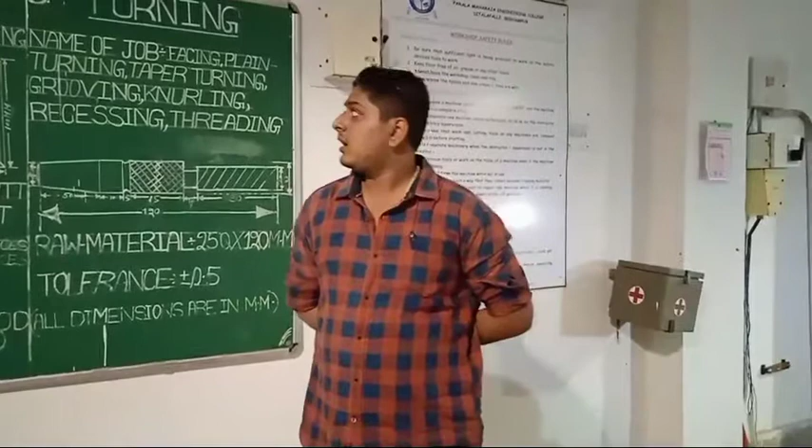So students, today we have discussed about how to prepare a job or how to make a job in a lathe machine. We have used cylindrical work, with operations like facing, plain turning, taper turning, grooving, knurling, and external thread.

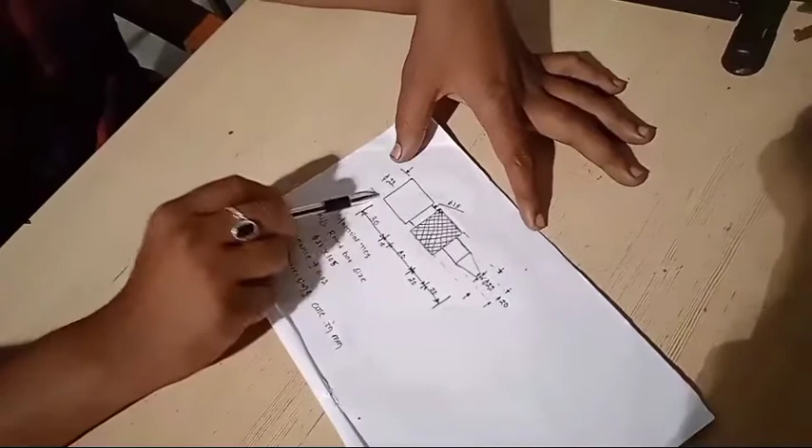In going to make a job, we discuss how to draw a figure. See, this is our figure. A cylindrical workpiece is there. Our bigger diameter is 22, and our lowest diameter is 15. Here, first one is our facing operation.

Then we go to plain turning. Next operation is our step turning. See, this part is a different diameter, so this part is called our step turn.

Then next we go to grooving. Then next we go to taper turning. Then third part is our knurling. Last one is our threading.

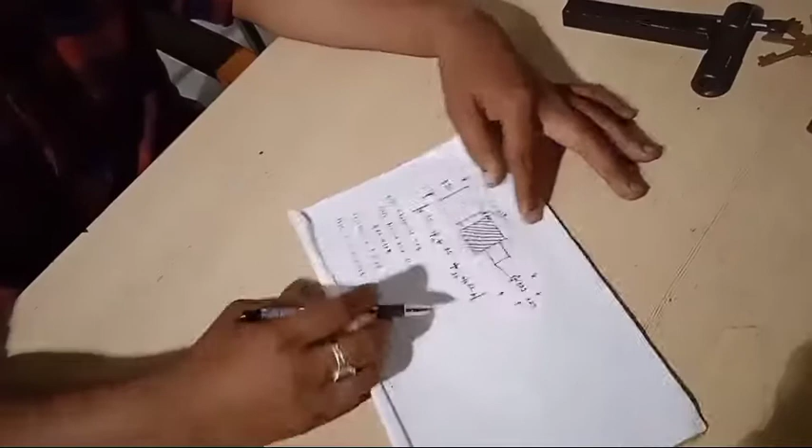Here our raw material required is MS round bar. MS full form is mild steel or low carbon steel. Mild steel diameter is, this is the symbol of diameter, our diameter is 25 and the length is 105. Here our tolerance is plus or minus 0.02. All dimensions are in mm.

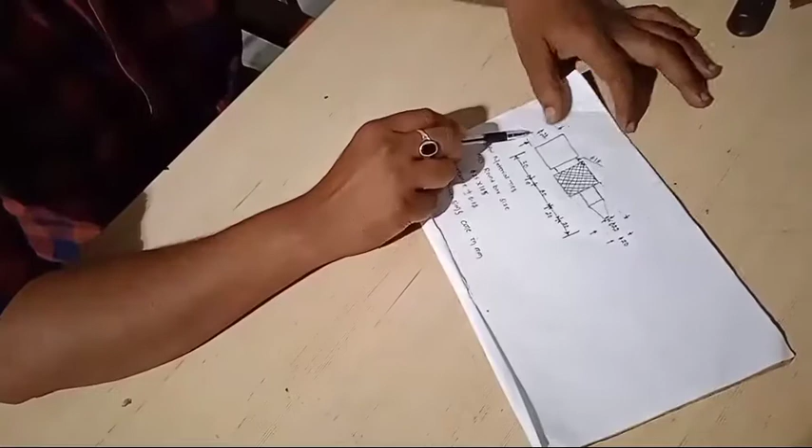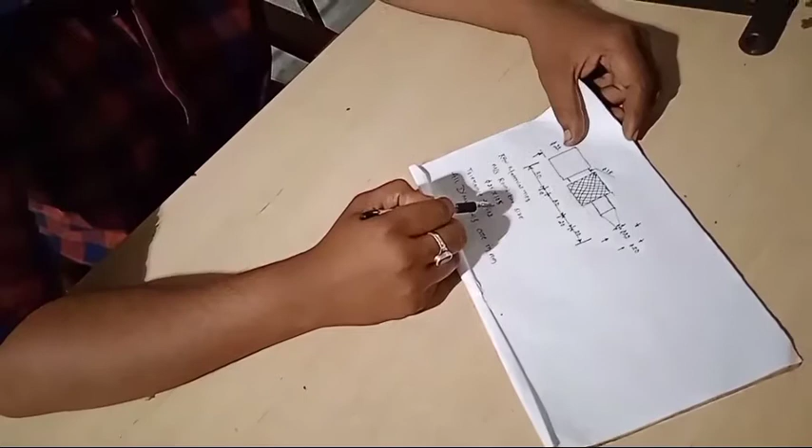One example: here diameter 22 means diameter is 22 mm. Here 30, so we call it 30 mm, 10 mm, 20 mm. Total length is our 100 mm. Material required is 105 mm. After making a job, we get a length of 100 mm.

Then we go to how to make a job. To make a job, before we use some machine tools. What are the tools? In power hacksaw we cut the raw material, or to remove it, from cylindrical raw material.

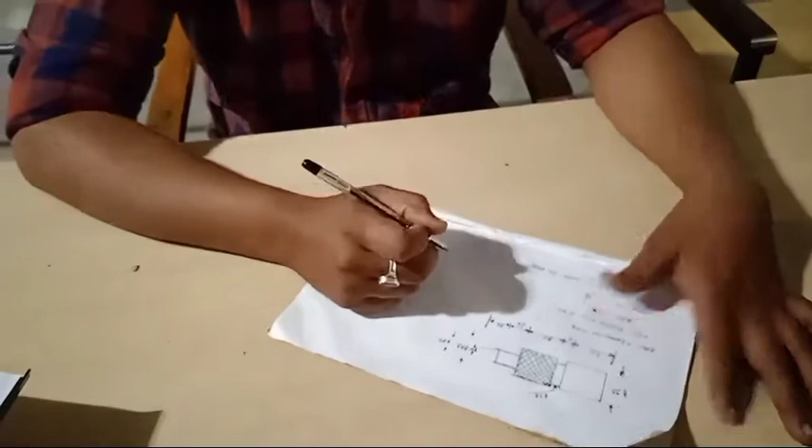Then apparatus required: first one is our measuring tool. What are they? First one is our steel rule. Second one is our Vernier caliper. Here is our Vernier caliper.

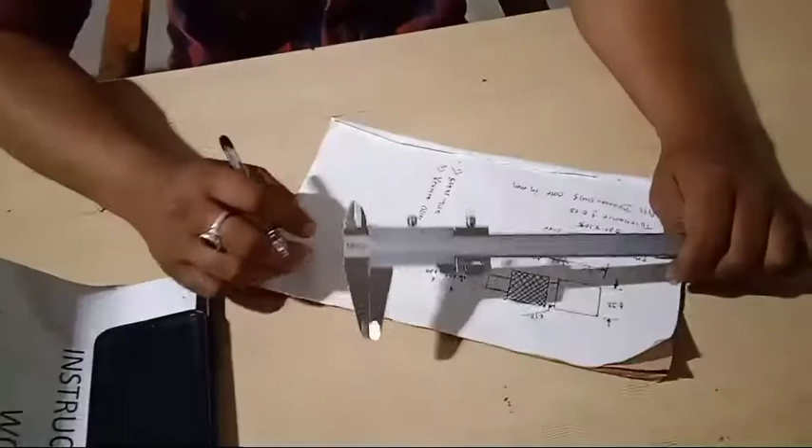Second one is the marking tool, scriber or chalk medium. Chalk is used for layout marking.

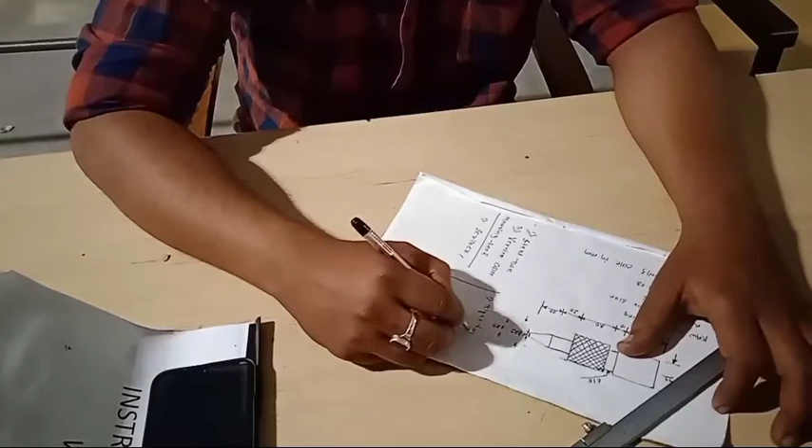Then third one, apparatus required in machine: first one is our right hand single point cutting tool.

Second one is our knurled tool. Here it is our knurled tool. This tool is used to make a knurling operation.

Third one is our V tool. V tool is used to make an external thread.

Fourth one is our grooving tool. Grooving tool is used to make a groove.

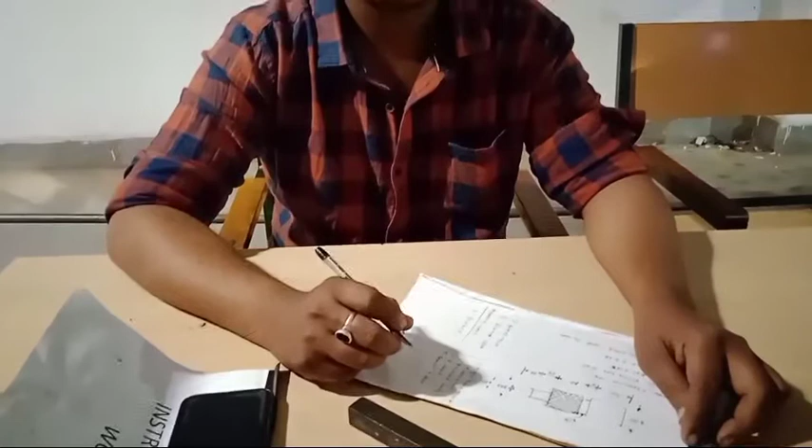That's it. Material required is our length is 105 mm and the diameter is 25 mm. Our machine is to remove the raw material by the help of, one machine is our power hacksaw.

This is our power hacksaw. Power hacksaw, how to work? See.

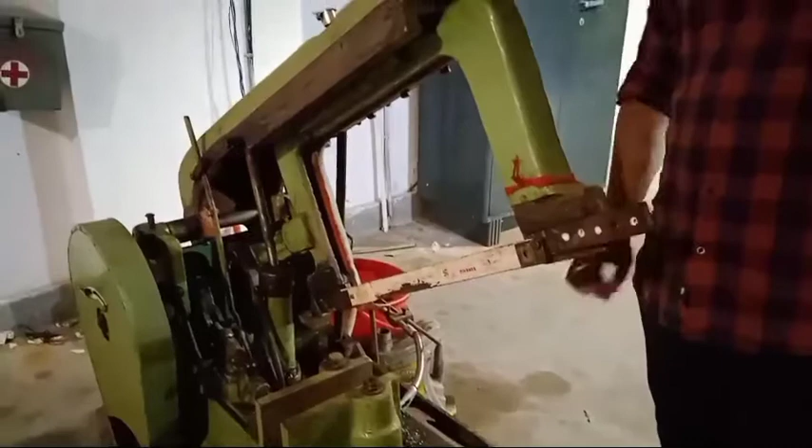This movable part is called the RAM. RAM is moving to forward and backward direction. Our material is removed in backward direction. See, these are going to backward direction, so our metal is removed in backward direction.

Here one part is there, this part is called the hydraulic tank. In the hydraulic tank, the ram is going downward. Suddenly, going to origin point, it pushes ahead, and the ram goes to its origin point.

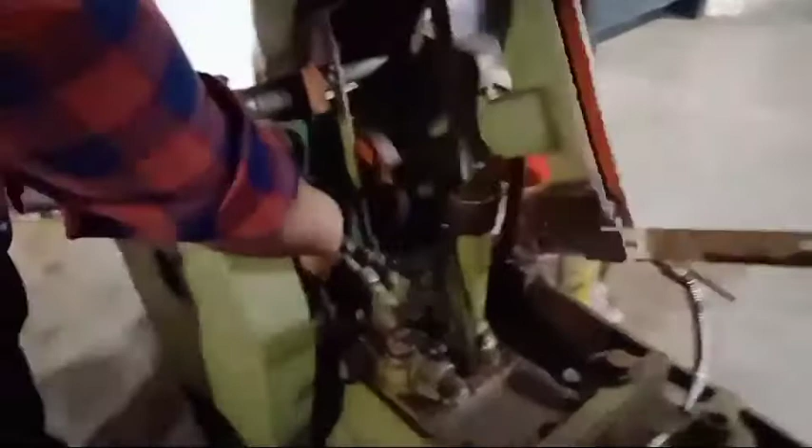Ram is going to forward and backward direction. Here one lever is connected. When it goes to downward direction, our ram is going downward. When it goes to origin position, the hydraulic tank is pushed up in upward direction, going to its origin position.

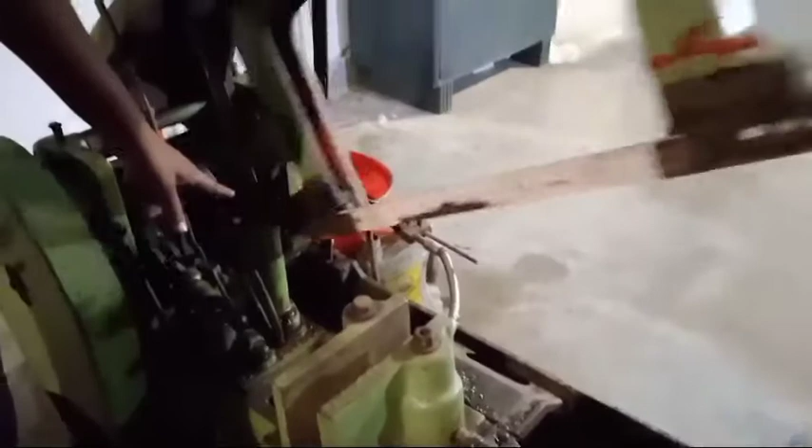Then we are going to how to cut a raw material. Our raw material length is 105 mm. In the steel rule, the dimension is 10.5 centimeters. Here we set a 105 mm length, then this part is cut or removed into two pieces. Now we cut the raw material.

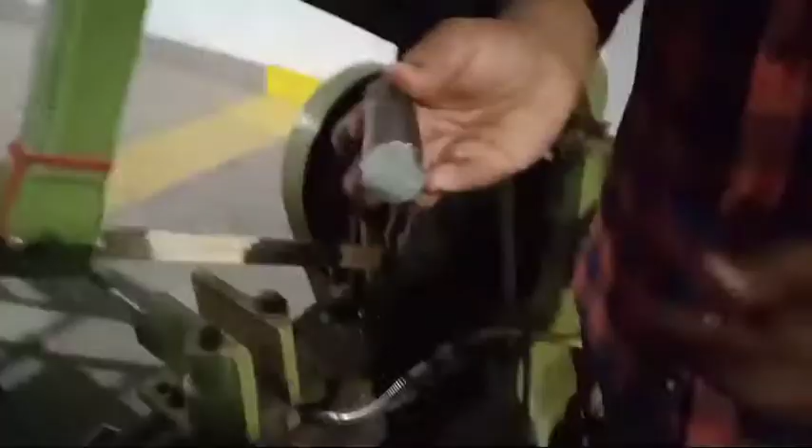Now going to measure the length. Here our dimension is our zero reading. Zero is coincide in 101, 102, 105. Okay, zero is coincide in 105. So our length is 105 mm.

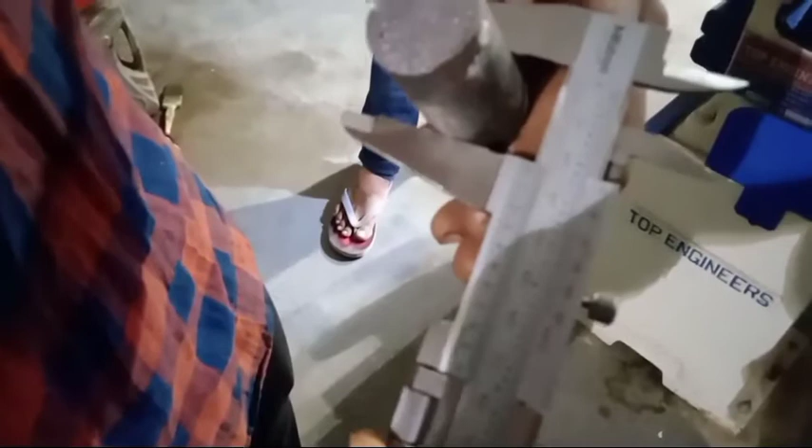And the diameter is our diameter. Diameter is our 25.4 mm.

So it is our specimen or workpiece or job. How do we get a job? To show in figure, complete all the operation, we call as job. Now this part is called as workpiece. See both ends are irregular and not parallel to the base. See, incline part is held in inclined position.

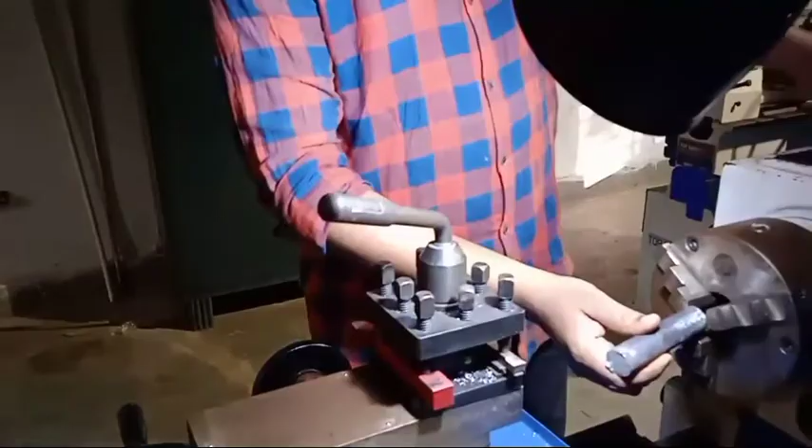Now we go to facing operation. In lathe machine, first operation is our facing operation. In previous video, I said how to create a facing and how to set the carriage. Carriage top side is our tool post. How to set the tool post position.

Again I repeat, our tool post is going to set for approximately 45 degree. Then our turning mechanism is working. What is the turning mechanism? The workpiece is rotated against a single point cutting tool on its own axis. Against means what? Anti-clockwise.

Friends, here we get a live center. See our point is there, center point is our live center. Again I cut one part, one depth of cut. Again we get, again.

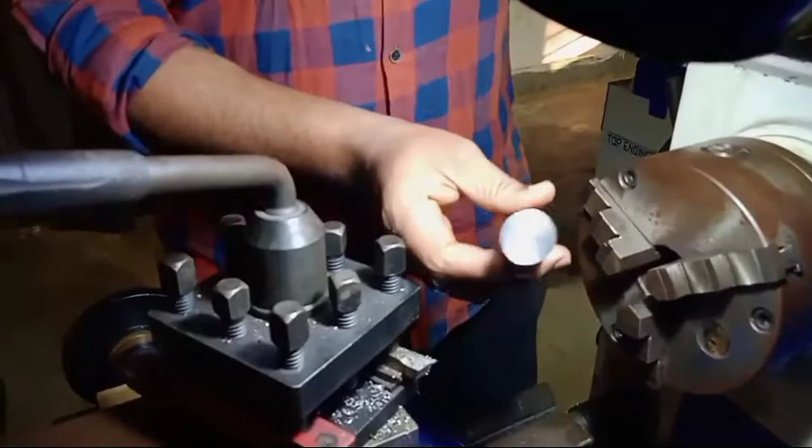Okay, now complete my facing operation. In before facing operation, the workpiece is not parallel to the base. Now going to facing operation, our workpiece is stay in vertical position. In one end is complete facing operation. Now we get a dimension value.

Our raw material required is 100 mm. We going to power hacksaw, we get a 105 mm length. Now in facing operation we get a 100 mm length. In facing operation our length is decreased. Then we go to next end of the workpiece, or next end remove the workpiece.

Now I going to fix in a work holding device. Again going to facing other end.

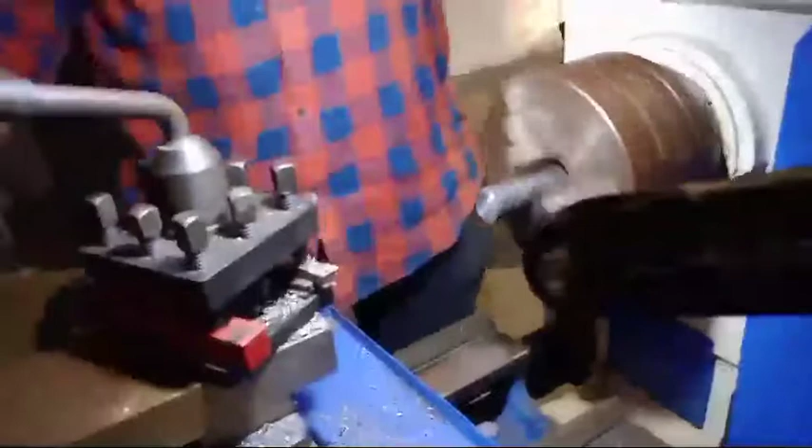Finally we get a 100 mm length by using facing operation. See both ends are removed. Unwanted material is removed in facing operation, workpiece both ends. Now we measure a length value. Our length dimension is our 100 mm.

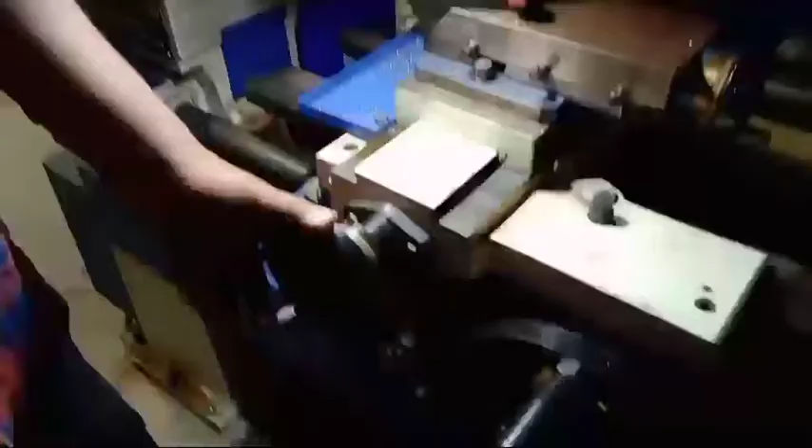Start. In facing operation, compound slide or carriage wheel is going to our feed, or depth of cut. And our cross slide hand wheel is going to create a cutting speed. This is our feed or depth of cut, 1 mm, 2 mm, 3 mm, or 0.5 mm.

Then force is applied, the force is called as a cutting speed. Here we going to move or rotate circular, clockwise or anti-clockwise. Our cross slide is movement, and it's going to create a cutting speed.

In plain turning, the diameter value is reduced. That process is called as plain turning. Now going to create a plain turning operation. Same process, we hold the workpiece in the work holding device.

And our tool post is going to 90 degree angle, 90 degree position. Then properly tight. In plain turning, carriage wheel is going to use our cutting speed, and cross slide hand wheel is going to depth of cut.

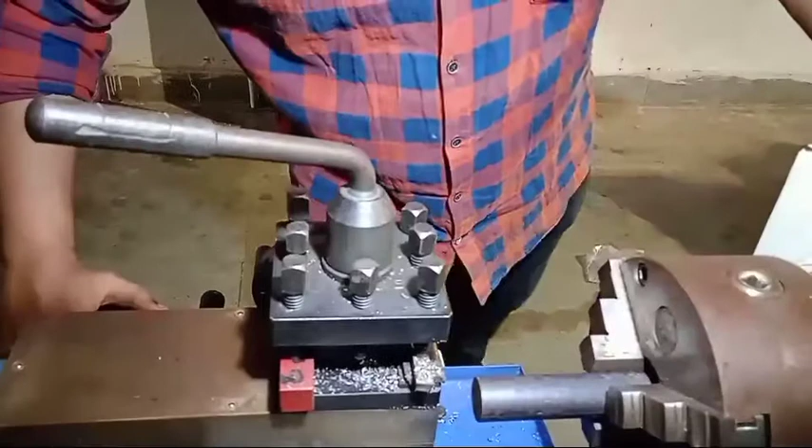Now we create a plain turning operation. Same process, workpiece is rotated against a single point cutting tool.

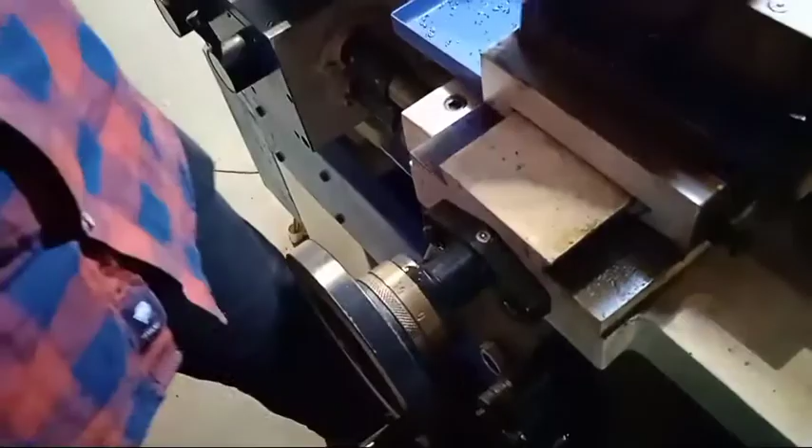Here you see, our diameter is reduced. Here our cross slide hand wheel is going to depth of 0.5 mm, 1 mm, 1.5 mm, 2 mm, 2.5 mm, like that. Now when we put the value, 10 division is called as 1 mm. Then our workpiece metal is reduced from the workpiece by 1 mm.

Before we go to make a plain turning operation, we check the diameter value, is our 25.4 mm. After I apply a cutting force of 1 mm, see what is the diameter value. Start.

Now we check the diameter value. Zero is coincide in 24.2 mm.

In same process, we make or create a plain turning operation, 100 mm length and the diameter is 22 mm. Step turning is equal to plain turning operation, but in step turning diameters are varied.

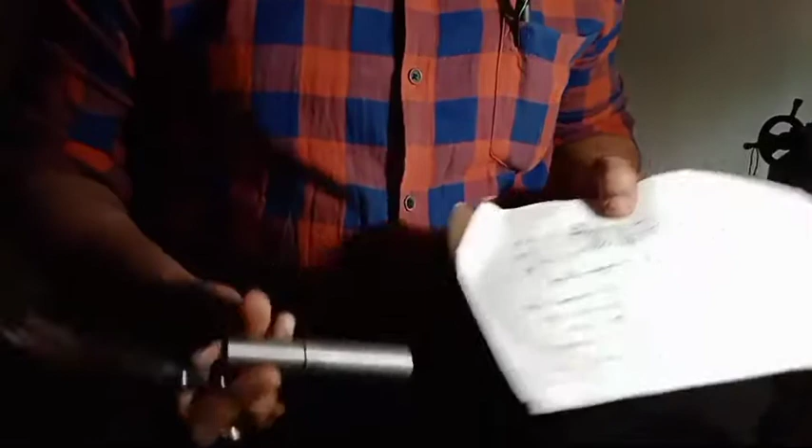After complete our plain turning or step turning, as shown in figure, dimension value and our specimen value, by the help of vernier caliper. Small diameter is our, here, 20 mm, and our bigger diameter is our 22 mm. Got clear? Here is a 22 mm and step part is our 20 mm.

Then we completed 3 operations: what are facing, plain turning, and step turning. And fourth one is our grooving operation. In grooving operation, we use marking process. In marking process we have used layout marking. Layout marking is use of chalk media, or thin coated chalk by the help of chalk piece.

Okay, now we hold the specimen or workpiece with the help of our work holding device.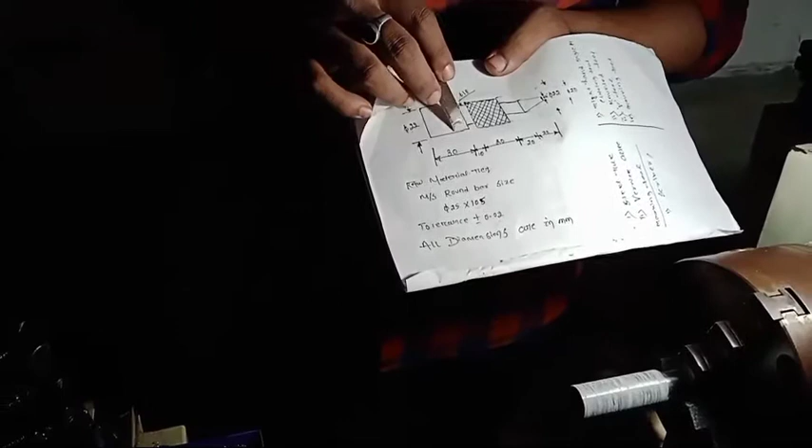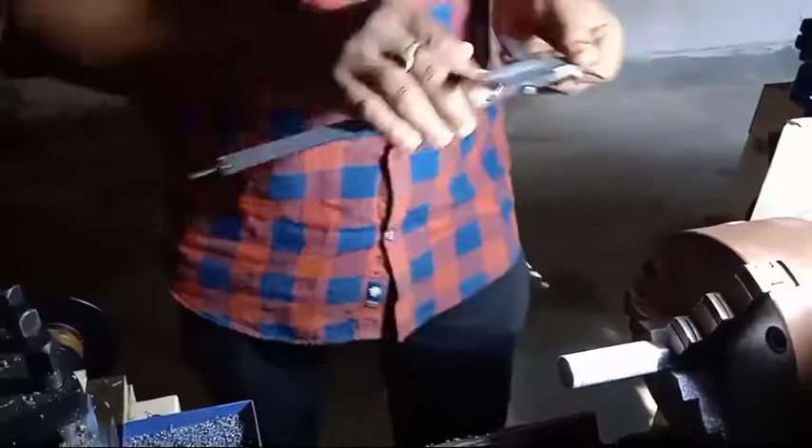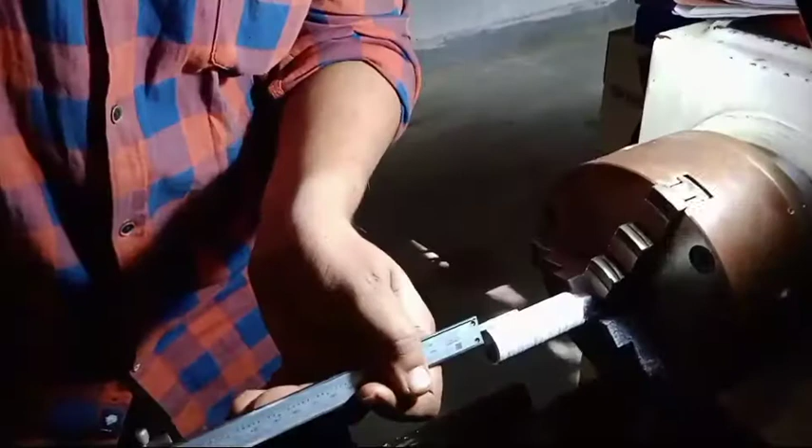In the figure, this part is called our grooving operation, with length 30mm and diameter 22mm. The grooving part is at 10mm distance. As shown in the figure, we start and measure the dimension value of 30mm. Zero coincides at 30mm. Then I tighten and mark the specimen with the help of a scribe.

So complete our 30mm, then plus 10, meaning our dimension value is 40mm. Zero coincides at 40mm. Okay, same process, marking with the help of scribe. We draw a mark line. This is our marking point.

For witness marking, at this point, witness marking means dark marking. We use our single point cutting tool here for witness marking.

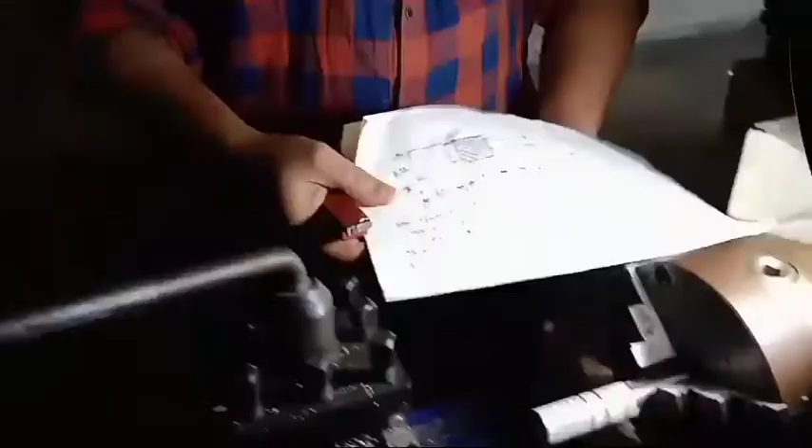So here students see our two marking points. At this marking point, we perform one operation called the grooving operation. In the grooving operation, we use the same single point cutting tool, moving it longitudinally to get a grooved part, as shown in the figure. This is the process I make for the grooving operation.

First, we hold the cutting tool with the help of our cutting tool holding device, called the tool post. Our cutting tool is held and our workpiece or specimen is also held. Now we create the grooving operation from this point to this point. Let's see how to make it.

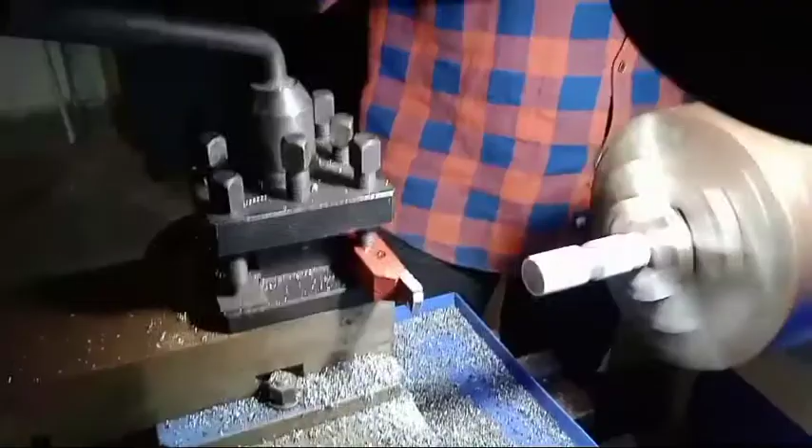Now our grooving operation is completed. Then we check the measured value here.

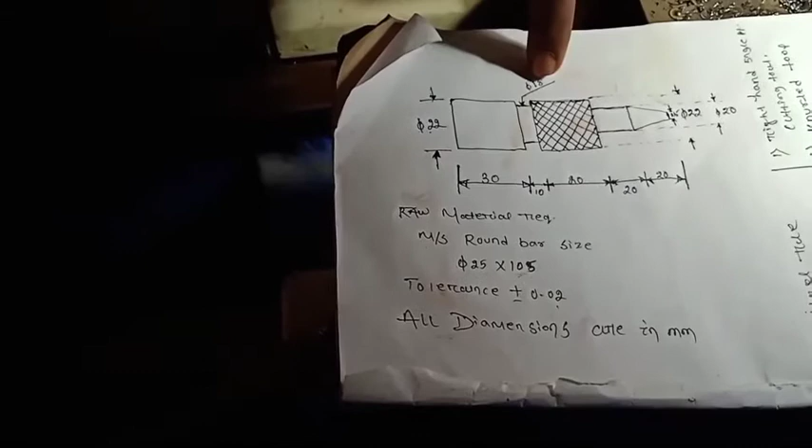Here our zero is coincided at 15, 16, 17, 18. As shown in the figure, our diameter is 18mm and we get 18mm, matching both the drawing and our specimen. Here is our 30mm, 10mm and 20mm - same as 30mm, 10mm and 20mm. So here we completed our grooving operation.

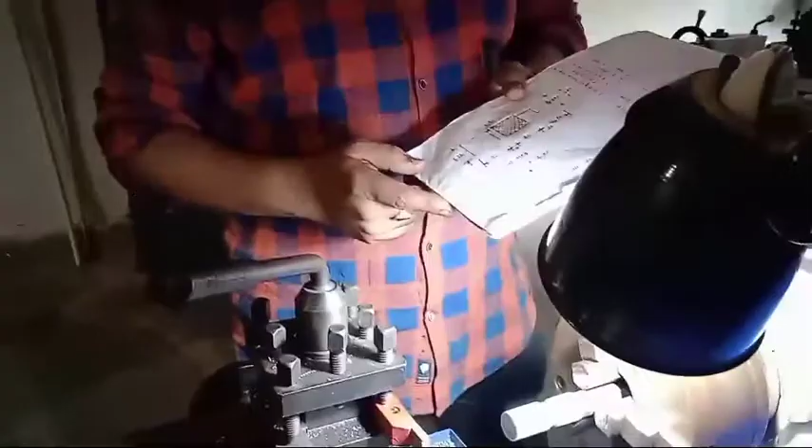Our next operation is the knurling operation, made with the help of a knurl tool. It is also moving longitudinally, and we make a knurled surface.

The knurled surface is used for gripping purposes. Here's how to make the knurling operation. First we set the knurl tool, same process with the help of the tool post.

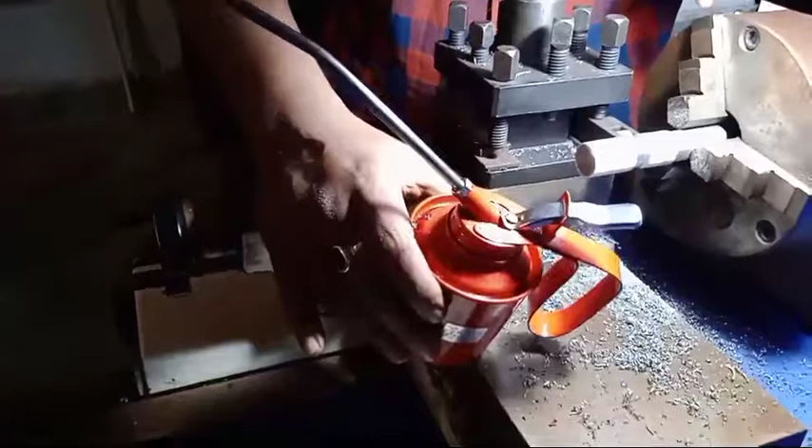Our next operation is knurling. Before we start the knurling operation, we use some process - knurling produces friction, so we use lubricant or oil to reduce the heat. So now we start the knurling operation.

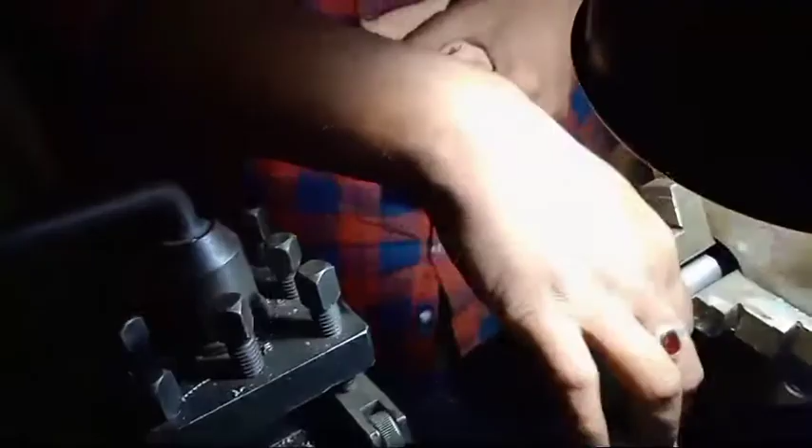So we complete our knurling operation. All students see this part - this is for gripping purpose. Here we made the knurling operation.

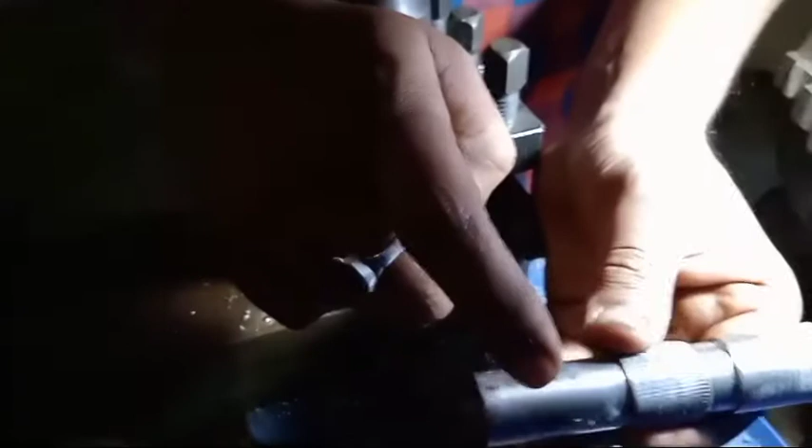First is facing, second is plain turning, third is step turning, fourth is grooving, then knurling, and our last or final operation is taper turning. As shown here, in taper turning we have one bigger diameter and one smaller diameter, with the length being conical.

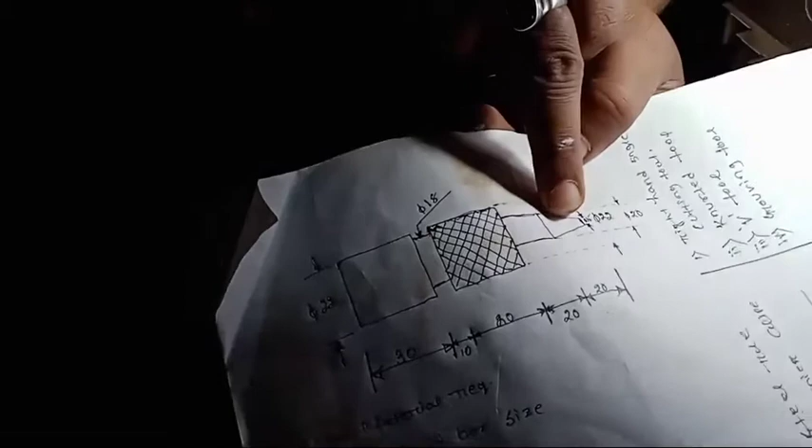So then we calculate our taper angle. How to calculate the taper angle? Let's discuss. Taper turning process is classified into three types - one is the form tool method.

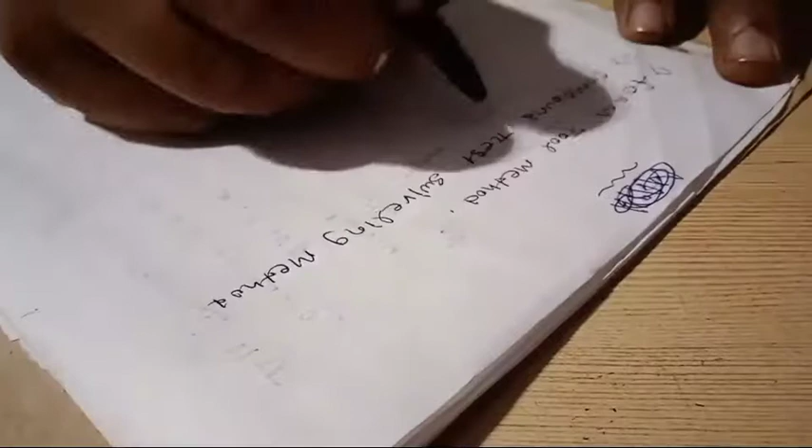Second one is our compound rest swiveling method. Third one is our tail stock offset method or set over method. So three types of our taper turning operation. In this small operation, as shown in figure, our length is 20 mm, bigger diameter is 20 mm and small diameter is 15 mm.

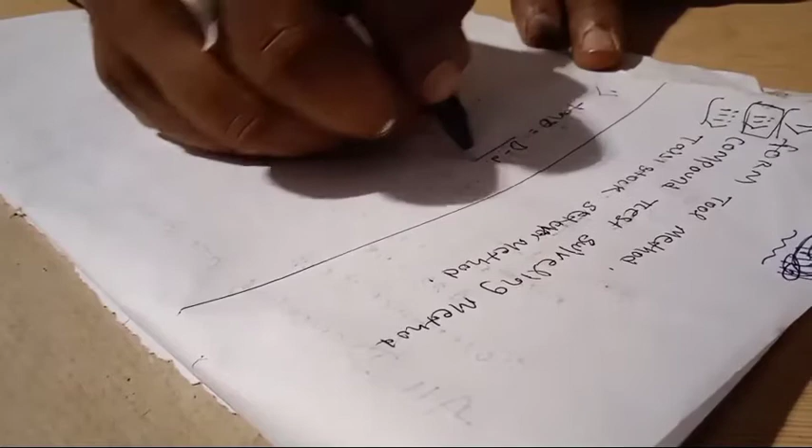So it is called small taper turn. We have created this taper turning by the help of our compound rest swiveling method. In compound rest swiveling method we have two formulas. First one is tan theta equal to big D minus small d by 2 into L. Other one is capital D minus small d by 2 into L into 630 by 11.

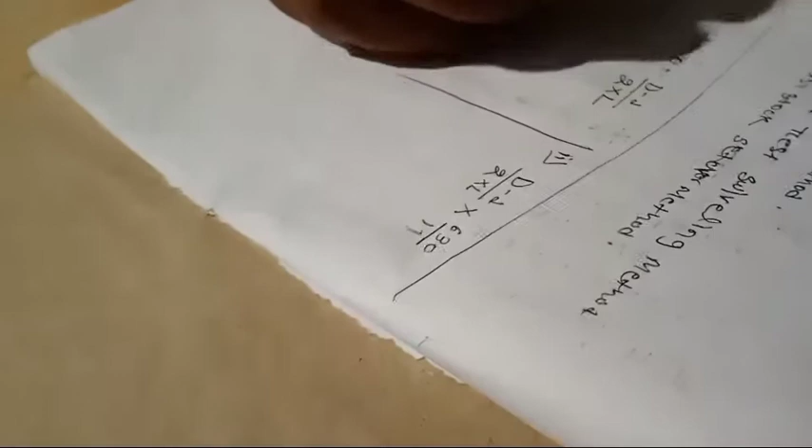Here big D is equal to our 20 mm, small d is equal to our 15 mm, and length is our 20 mm.

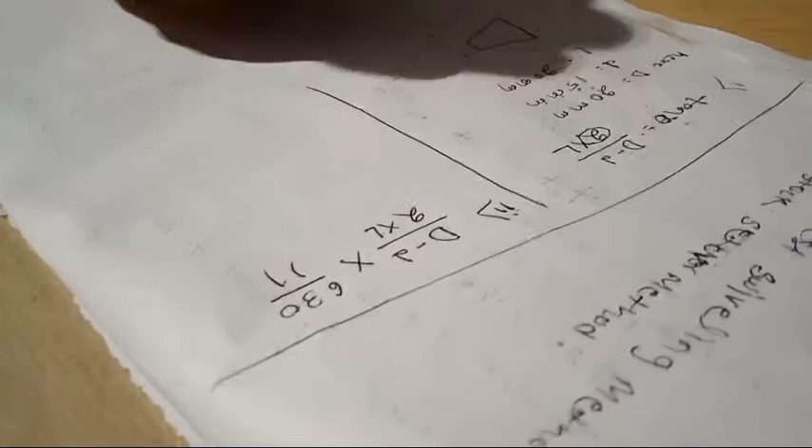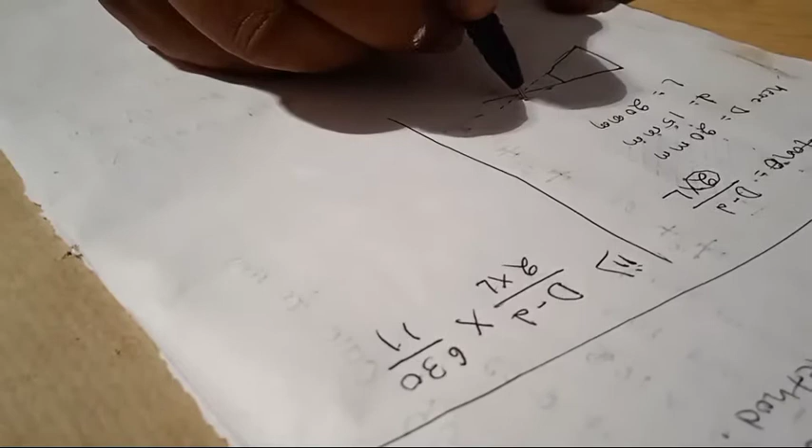Here students, you have one question: sir, why we multiply by 2? Because in taper turning, this part is our taper turning, so length is expanded on this part and that part, and it coincides in a single point, and our length is missing this part. So we have multiplied by 2.

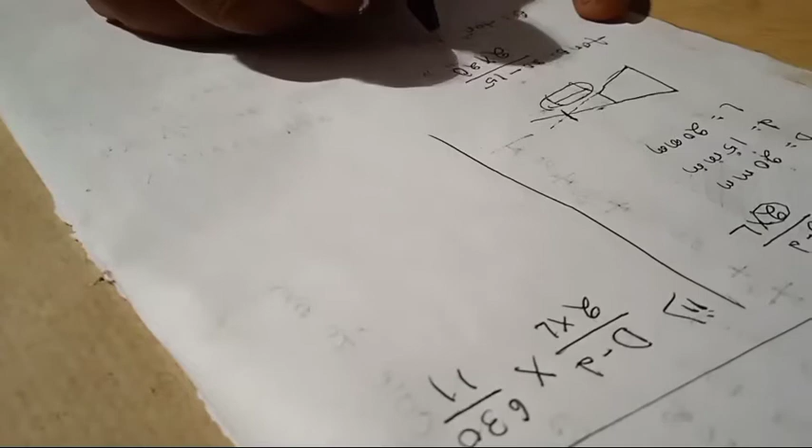So now we calculate: tan theta equal to big diameter 20 mm minus small diameter 15 mm, over 2 into length which is 20. Now theta equal to tan inverse of 5 by 40. So angle, students, we get theta value as 7.15 degree. So we take approximately 7 degree.

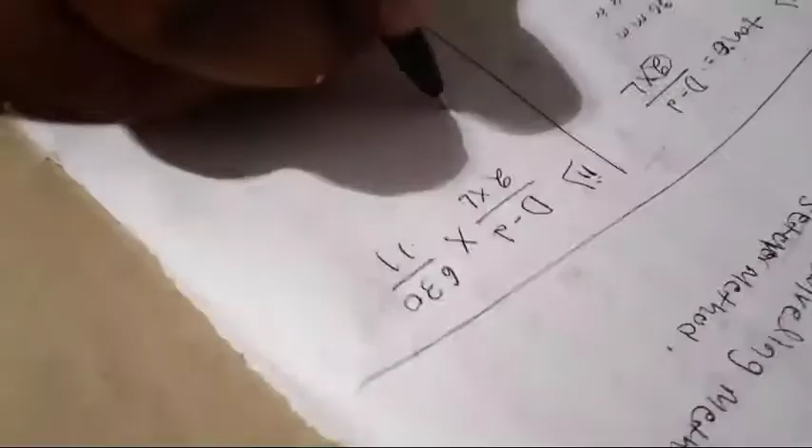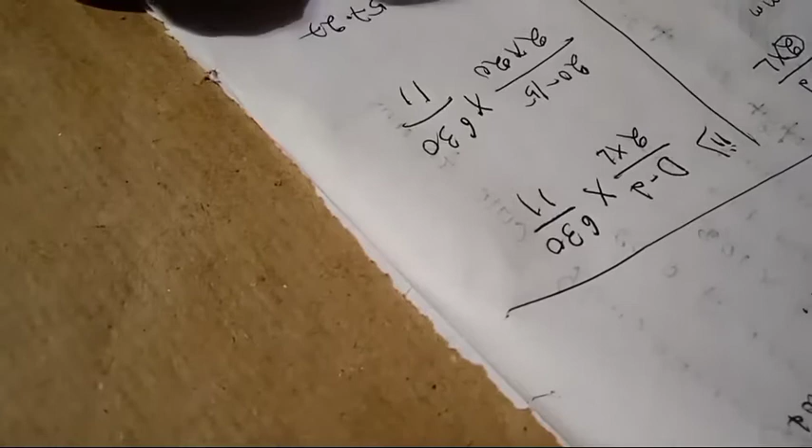Same here, same process. Our big D is 20 minus small d is 15, over 2 into 20, into 630 by 11, implies 5 by 40 into 57.27. So our answer is same, 7.15. So same, approximately taken as 7 degree. Both calculations give the same reading. So students, we get 7 degree.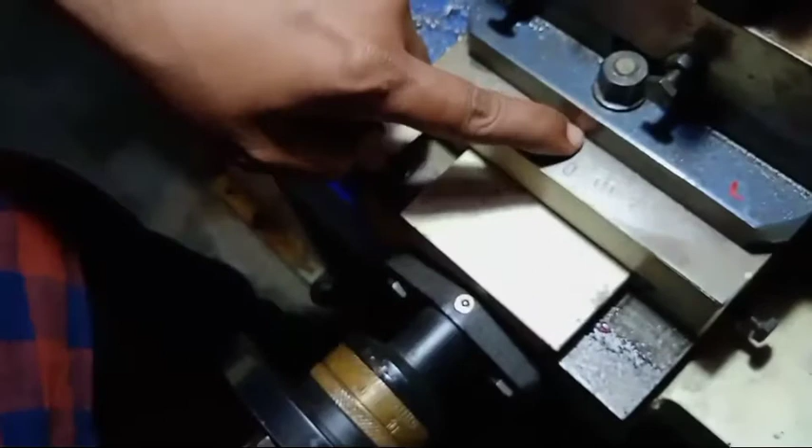So how to apply 7 degree? See this part, this is our compound rest swiveling method, compound rest degree swiveling method. Here students will see 0, 1, 2, 3, 4, 5, same divisions, total 10 divisions. So it is 10 degree, 20 degree, 30 degree, 1 degree, 2 degree, 3 degree, 5 degree. Our reading angle value is 7 degrees. So we take...

Here we get an origin point or marking point, and create 7 degree in clockwise direction: 5, 6, 7. And other side is our make taper turn, this part.

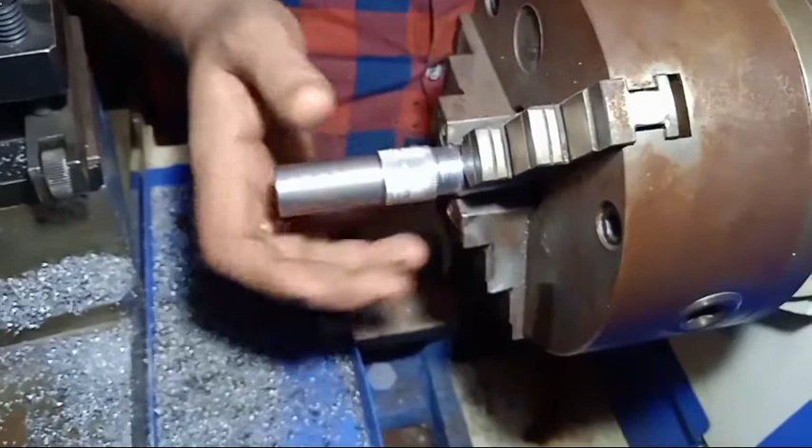So here students, same, we take a marking media by the help of chalk, and our single point cutting tool like this.

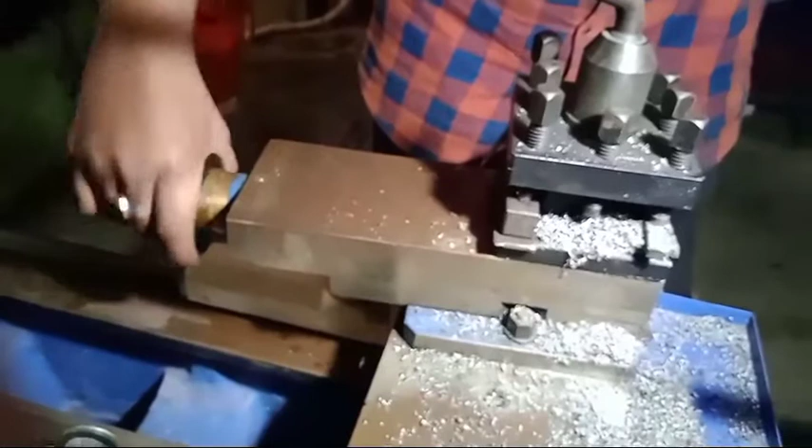In taper turning, our cross feed is applied to apply a depth of cut, and our top slide is movable longitudinally or horizontally for cutting speed. In plain turning, cross feed is applied for depth of cut, and compound slide or carriage wheel is longitudinally movable for applying cutting speed. In taper turning, same process, but cross slide is depth of cut and top slide is our cutting speed.

Now we create the taper turn. Same process, students: our workpiece is rotated against a single point cutting tool, clockwise or anti-clockwise.

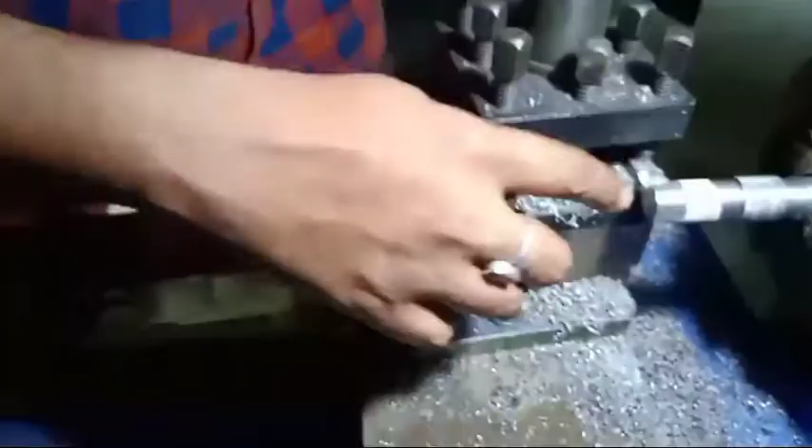Here you see, our conical length is provided or made, conical length is created. Same process followed: automatically small diameter comes out as 15 and our bigger diameter comes out as 20. Now we have completed our taper turning.

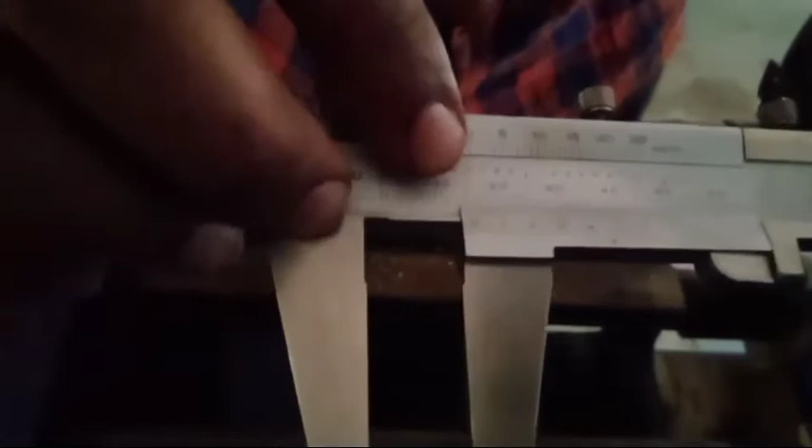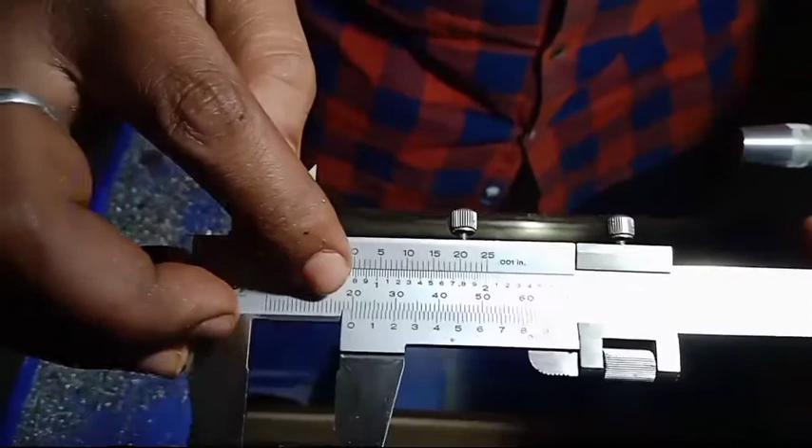Then after, we check the dimension value. First we check our small diameter - it is coincided in the 15 and 16 middle part. And our bigger diameter is coinciding at 20 mm.

That means our bigger diameter is 20 mm. Length or tapered length is our 19.9. So students, the measured value is 19.9, small diameter is 15.02, because our tolerance given is some plus or minus 0.02. That means plus 15.02 or minus 14.98, same process.

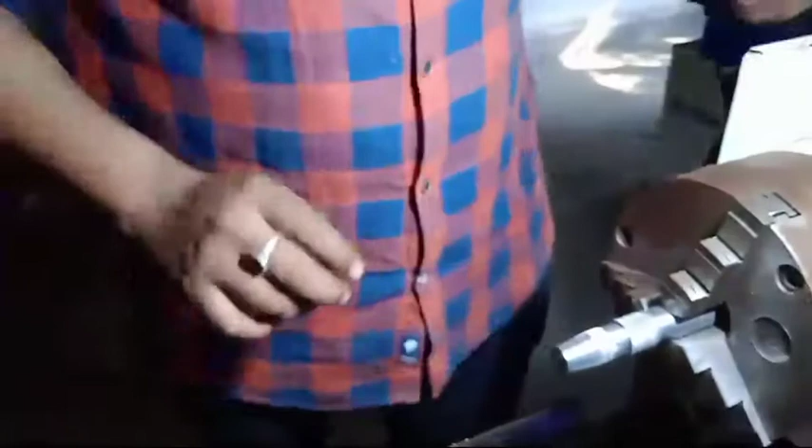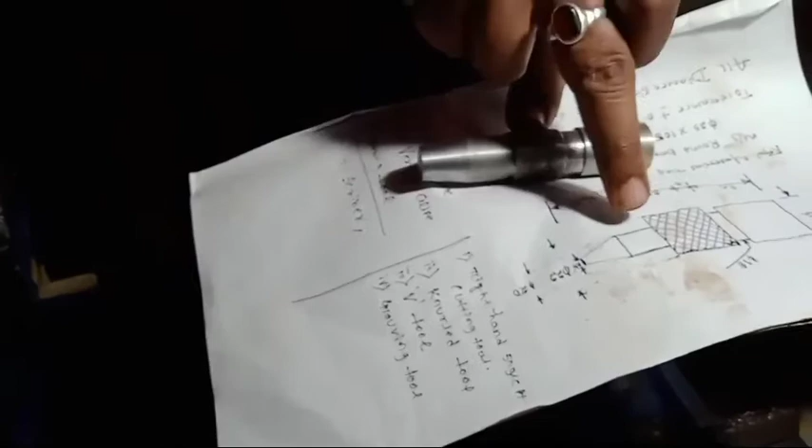So with our dimension value, we completed our turning section and got a finished product. As shown in figure, length is 30 mm - grooving operation is 10 mm length, knurling operation is 20, step turning is 20, and taper turning is 20.